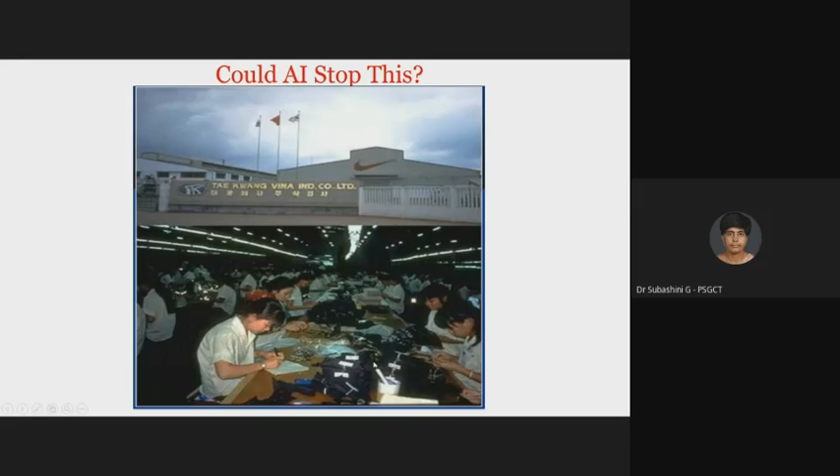The problem we have nowadays is getting manual workers for doing a particular task, and even the efficiency with which they carry out the task. Only when they are being monitored do they work, and they try to take advantage whenever they are not being monitored. All these types of situations could be avoided if that replacement is possible in the context of applying AI.

Can we build artificial people? It is not that entirely we replace with an artificial man or woman; we are trying to reduce the labor that is being performed. That is the reason behind the coining of the word robots itself, which refers to robota, meaning work or forced labor.

That is how it all came into existence from a Czech play, Rossum's Universal Robots, written by Karel Čapek in 1921. This term robot was coined meaning it would perform a task which is difficult or boring for a human to perform. We normally say robots are highly suitable for 3D tasks, where 3D refers to dull, dangerous, and dirty tasks.

The Industrial Robot Association has classified these robots into various levels. The definition provided is that it is a device with a degree of freedom, meaning it is movable to some extent, that can be controlled. The first category of robots are manual handling devices. The second category performs some fixed activity, that is, they perform repeated tasks.

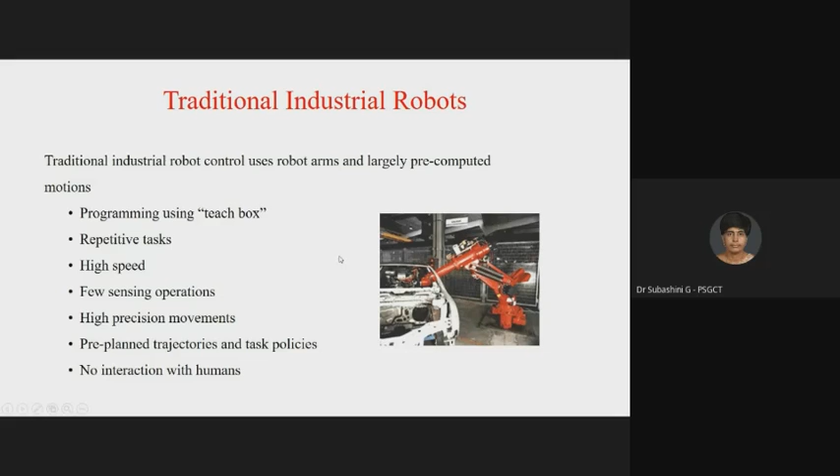What are the problems with the traditional programming capabilities which had the requirement of intelligent environments? Limited sensing - whenever something is uncertain, it is not able to decide. No interaction, there is no provision for interaction, and there is no reliability that the task is being performed perfectly. If you want to modify what the robot is performing, then it has to be entirely reprogrammed. There was no provision for adaptability. It was a static system. To make it perform a different set of tasks, it has to be again reprogrammed from scratch.

Because of all these problems existing in the traditional industrial robot, which had a minimum level of intelligence, it was a motivation for us to create something intelligent. So that is what we have today.

We have sensing, lot of sensing in the form of machine vision. We have lot of activities with the human in terms of natural language processing. Because of the learning that is happening, it is able to handle uncertainty. And of course reliable, because of the interaction the human provides, and provision for dynamic changes. So it is adaptable - once learning happens, then it becomes adaptable. Because of all these advantages needed to be added on to the standard system, we went on for AI. So this is the reason for the need for AI.

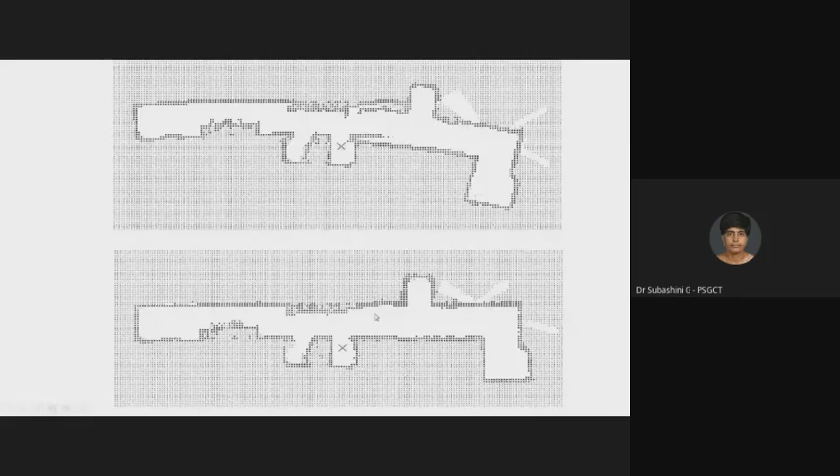So all these are dots, actually it is a grid which is being constructed, and how you do analyze where you are and create a map. As you travel across the environment, you are in the process of creating the map. So this is how it happens. So exploration, while exploring, you do construct.

So these dark lines say that these are all the boundaries, you cannot visit the place. This says it is an open space, and here some objects are available, which means occupied. And now if you want to move across this open space, what you will be using is determine the centroid and see to that you walk in the center so that you don't collide with any objects.

So this also is one common problem which can be used. So here is an animation of frontier-based exploration. So how you start with a particular place, and as you travel across the environment, you create the map. So actually the map is constructed here based on the exploration, that is based on the movement of the robot, what it senses, it keeps on updating the map.

So robot senses the environment. So low certainty, they form the frontiers. They are nothing but the borders, and rate the frontiers using the centroid, and using the centroid values, you develop a navigation path. So simultaneously, you are doing both the process of localization and map making as you explore the environment.

So how would the interaction, human-robot interaction, happen in an intelligent environment? What are the modes? So one is you can have it controlled and used by untrained users by means of some easy to use interface, or through intermittent commands. Fine. So where the robot will have autonomous capabilities, understanding commands with different levels of complexity, so that it can control with the maximum autonomy, or interact with a variety of humans.

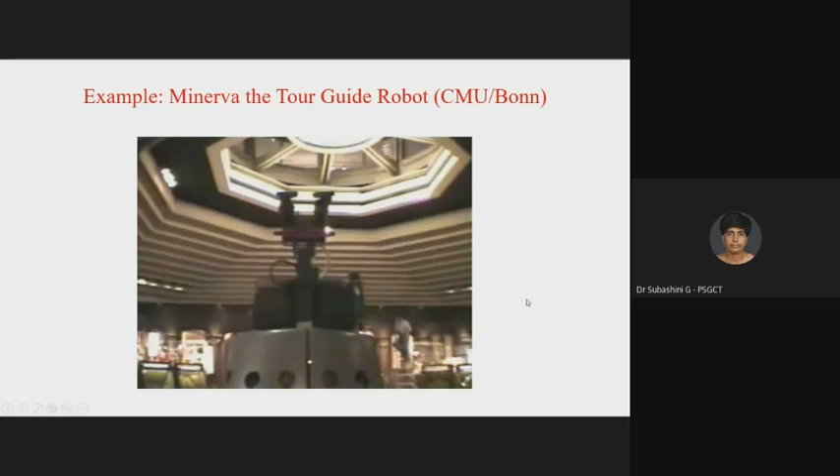So this is an example of a tour guide robot developed by Carnegie Mellon University, named Minerva, which was employed in a museum. People use this as a guide to visit the various places in the museum. Can you see?

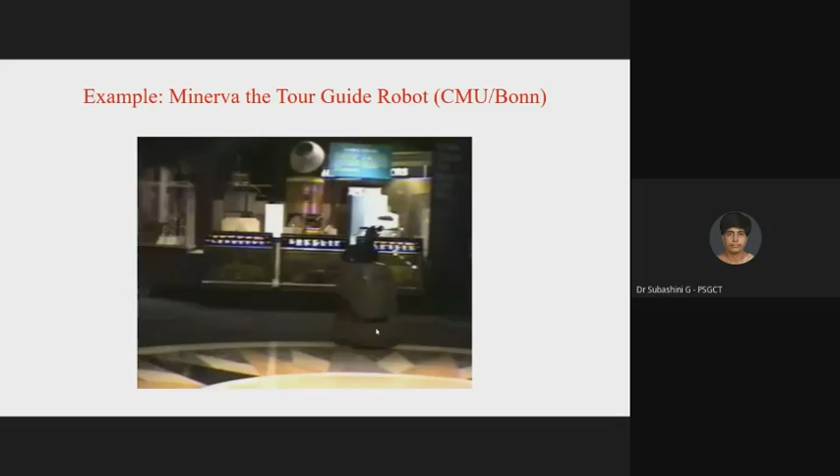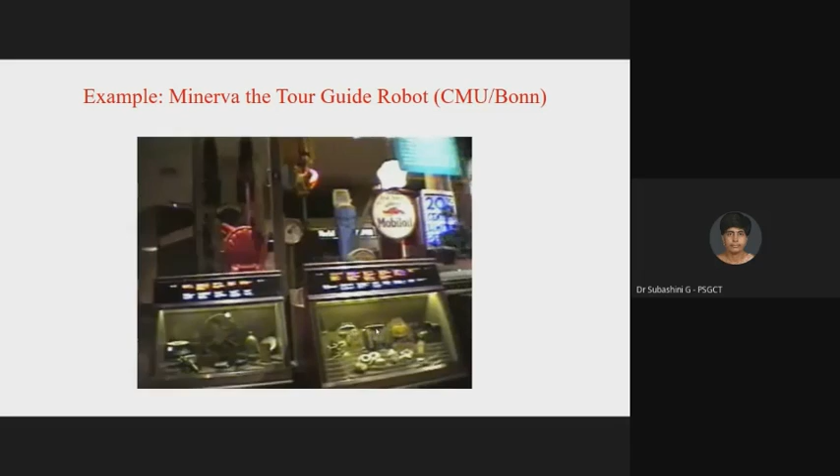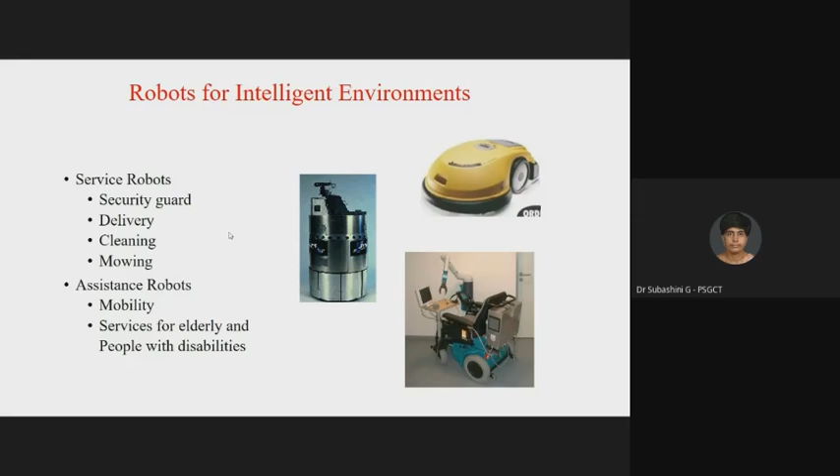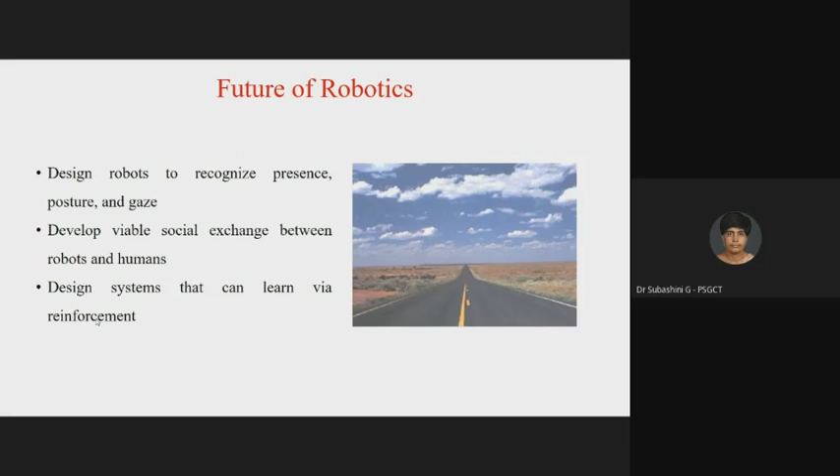Differences we have seen, and here is the future of robotics, intelligent robots. So you can design robots to recognize presence, posture, gaze, exchange, human interface, and design systems that can learn through reinforcement. This is the emerging field now, where you build systems which can learn through feedback. So learning through feedback and designing intelligent machines through feedback is the current technology which has more focus.

So I end my presentation here. I think I have given you an overview of where intelligence can be put into a robot, what type of research problems you could approach, and some of the intelligent systems we have in the market today.